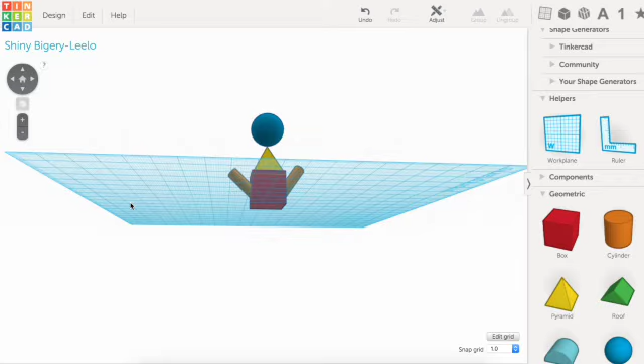If you look right here, what I made is kind of a silly little, you could call it a person or a robot, just really simple using a box, cylinder, pyramid, and ball. I created this in 3D. It looks pretty cool, at least I think it does. But do you think we will run into problems when we try to 3D print?

This is something that I think is really hard to understand because, well, you look at it on your computer and it looks good, so that must mean it's going to be great to print. Even if you have a project that looks exactly the way you want it to, like this piece, it doesn't necessarily mean it is going to print well.

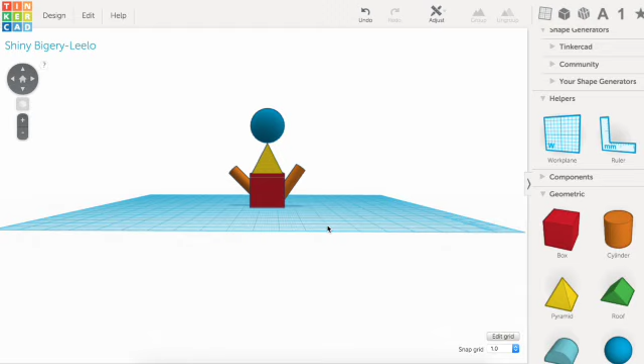The thing that you need to think about as you design something that you want to use 3D printing to make, you need to think about how the printer actually creates your project. Imagine that you had a hot glue gun in your hand and you are squirting hot glue onto a tray or a sheet of paper or something, and you want to make a sculpture out of it.

Or maybe if you had a tube of icing and you wanted to make a really cool cupcake design. When you do these things, you always need to make sure that you're building upon something that you already made. So if you're squirting icing onto a cupcake, you are adding a layer and then maybe it gets smaller and smaller, or an ice cream cone, it kind of swirls up into a point at the top.

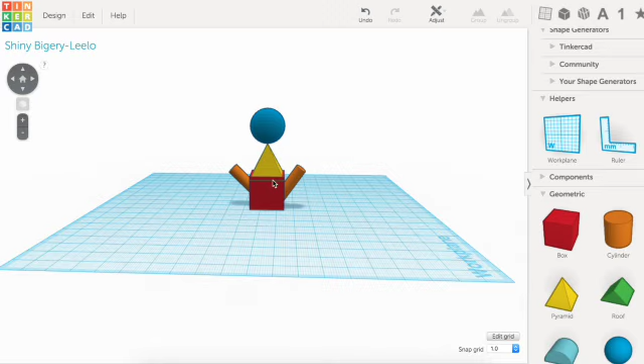This is because you need something below. If there's nothing below, it's just going to fall down. So something that we run into issues with a lot when we're 3D printing is, say these arms were extremely long. And I mean really long. And maybe they were angled up a bit more. That actually might help us.

So if this arm's long, but it's angled, then as the printer goes and prints layers of plastic filament to build these shapes that our computer has told it to do because of what we've created in 3D, it is able to build these layers. But as it gets out to this point of the arm, there's nothing below the arm to support it.

And it's really likely that all of those things that we've tried to build aren't going to work because they're just going to fall to the platform. There's not going to be any plastic below to support it there. Now there are ways when you 3D print to fix this. You can print with a support or a brim.

So the printer might print a thin layer of plastic to hold this arm up that you can easily break off. And that usually works for a lot of things. But it's just something to keep in mind. When you 3D print, you need to be very conscious of the fact that what you're making needs support below it. And a sphere is a really, really great example of this.

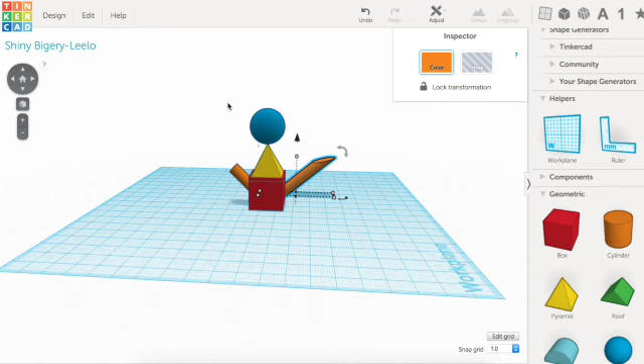Because if you're working with a circle, you run into tons of issues. This circle doesn't really have a bottom, right? It has the rounded edge, but balls roll. So as soon as this plastic starts to get hard, it's going to roll off the work plane. Well, the 3D printer thinks that it's still below the head, so it's going to keep trying to build plastic.

And that's why sometimes you see spirals and spirals of plastic all over the place, because the printer was not able to create what you were imagining, or what you were able to create in CAD. So this is a quick video to get into something that's a little bit complex, but I really want you to think about that as you design things in 3D. Make sure you're designing things that you will be able to print.

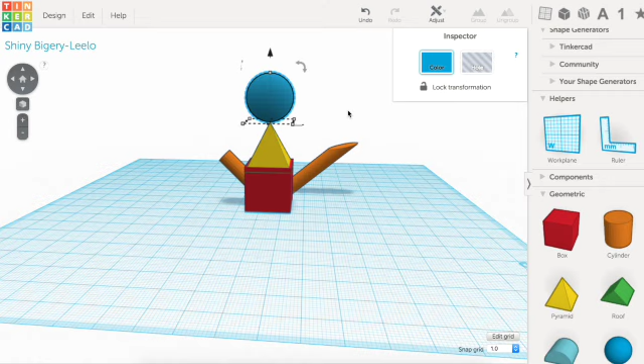And there's still ways to use 3D printing with spheres. You just have to be creative with it. Like maybe instead of using a sphere, we would use a half sphere. And we could print two of them and then glue them together, and then add them to our figure.